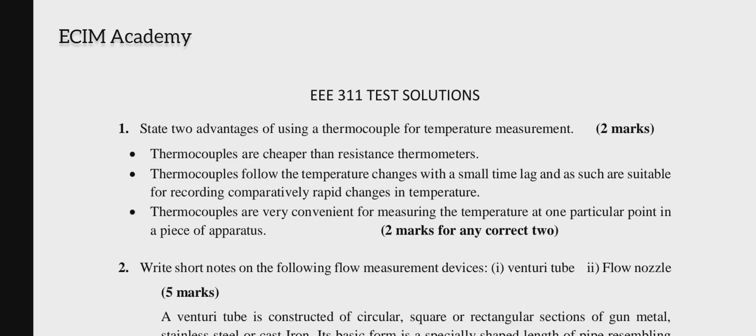Alright, so we have the solution to the tutorial problems on industrial instrumentation. We have the solution to the 4 problems earlier posted on the channel, and here we have the solution on the screen.

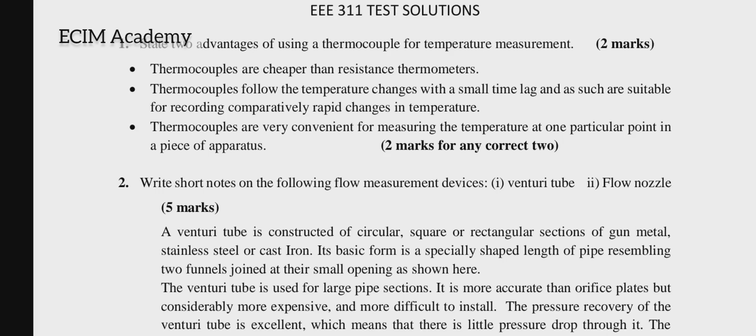As you can see, the first problem states: state 2 advantages of using a thermocouple for temperature measurement. We have 3 advantages listed here. Thermocouples are cheaper than resistance thermometers. Thermocouples follow the temperature changes with a small time lag and as such are suitable for recording comparatively rapid changes in temperature. Also, thermocouples are very convenient for measuring the temperature at one particular point in a piece of apparatus. So we have 2 points there.

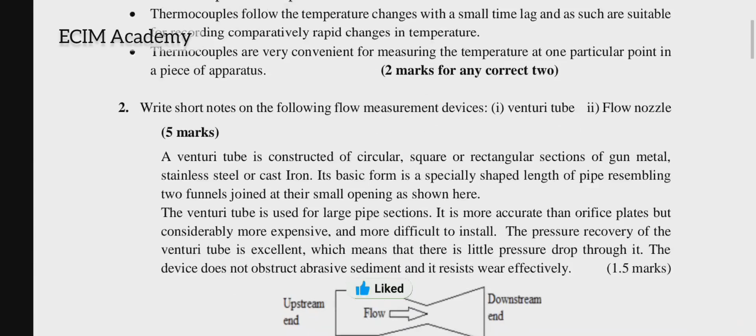And we also go to number 2. Write short notes on the following flow measurement devices: venturi tube and a flow nozzle. A venturi tube is constructed of a circular, square or rectangular section of gunmetal, stainless steel or cast iron, and its basic form is a special shaped length of pipe resembling two funnels joined at their small opening, as shown here.

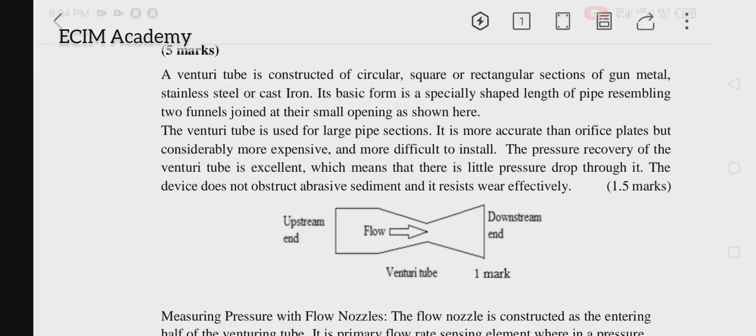The venturi tube is used for large pipe sections and is much more accurate than orifice plates, but considerably more expensive and more difficult to install. The pressure recovery of the device is excellent, which means that there is little pressure drop through it. Okay, so we have the figure here. The device does not obstruct abrasive sediments and it resists wear effectively. So we have the structure of the device.

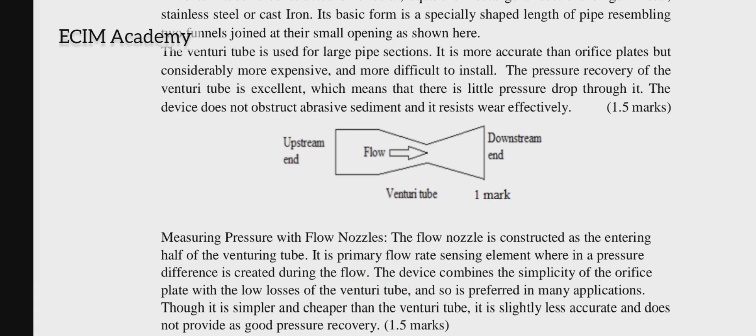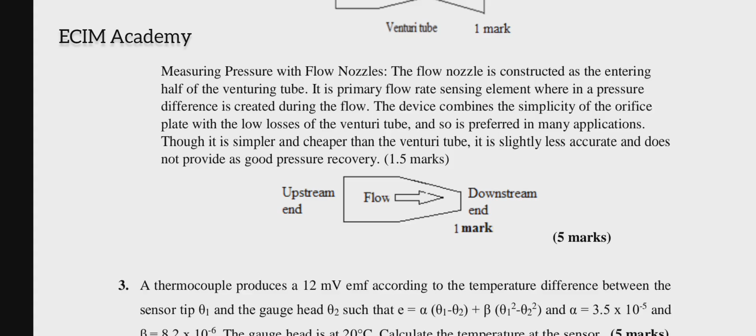Now, the flow nozzle is constructed of similar material, but it's like the entering half of the venturi tube, and it's a primary flow rate sensing element using the pressure difference created during the flow. The device combines the simplicity of the orifice plates with the low losses of the venturi tube and is preferred in many applications. Though it is simpler and cheaper than the venturi tube, it is slightly less accurate and does not provide as good pressure recovery. We have the sketch, the section of the flow nozzle also. So those 2 problems earn you 5 points. Then we have number 3.

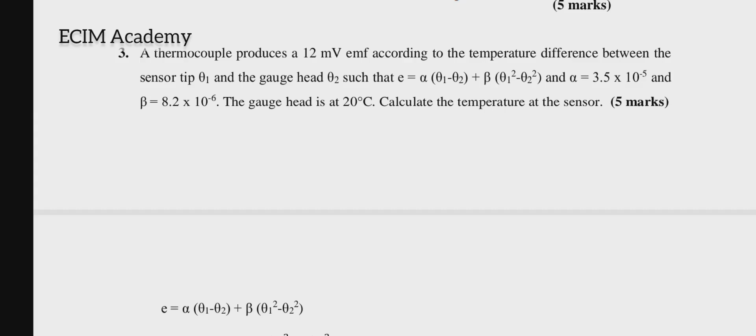It's a question on a thermocouple that produces 12 millivolts according to the temperature difference between the sensor tip and the gauge head. Sensor tip is θ1, gauge head is θ2, so that it follows the equation E = α(θ1 − θ2) + β(θ1² − θ2²). Alpha is given as 3.5 × 10⁻⁵ and beta is 8.2 × 10⁻⁶. The gauge head is 20 degrees C, and then you have to calculate the temperature at the sensor, 5 points. So we have the equation written down here.

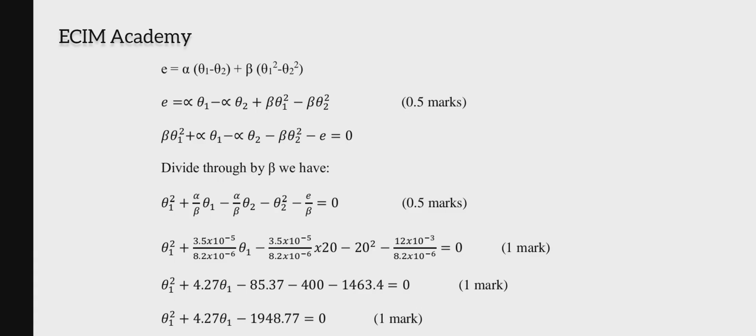So first thing is to express the equation to form the quadratic equation. When you open up the brackets, you collect the like terms and rearrange. As you do that, you get E = αθ1 − αθ2 + βθ1² − βθ2². So βθ1² + αθ1 − αθ2 − βθ2² − E = 0. Alright. Now, if you divide through by beta, we have θ1² + (α/β)θ1 − (α/β)θ2 − θ2² − E/β = 0.

So now we can substitute the values of alpha and beta and the EMF produced, which is 12 millivolts. If you do that, you have the next line: θ1² + (3.5 × 10⁻⁵ / 8.2 × 10⁻⁶)θ1 − (3.5 × 10⁻⁵ / 8.2 × 10⁻⁶) × 20 − 20² − 12 × 10⁻³ / 8.2 × 10⁻⁶ = 0. If you simplify, we have θ1² + 4.27θ1 − 85.37 − 400 − 1463.4 = 0. θ1² + 4.27θ1 − 1948.77 = 0.

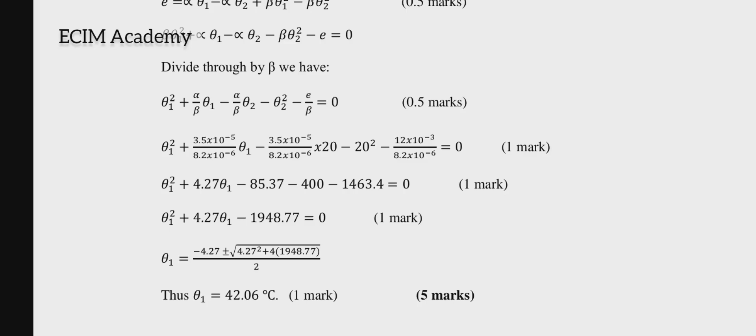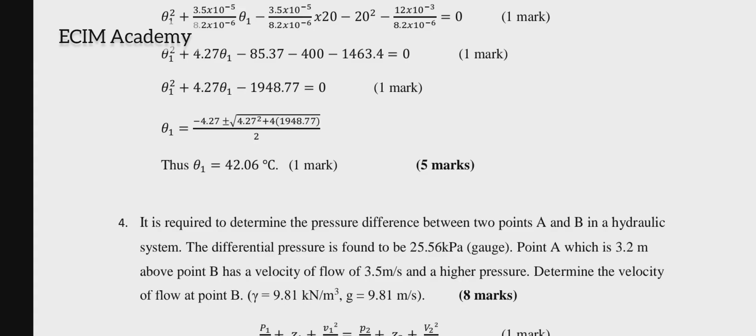So you use the quadratic formula to solve this. θ1 = (−b ± √(b² − 4ac)) / 2. In this case, −b is −4.27, plus or minus the square root of 4.27² plus 4 × 1948.77, divided by 2. Thus, the positive answer will be θ1 = 42.06 degrees C. I will neglect the negative answer.

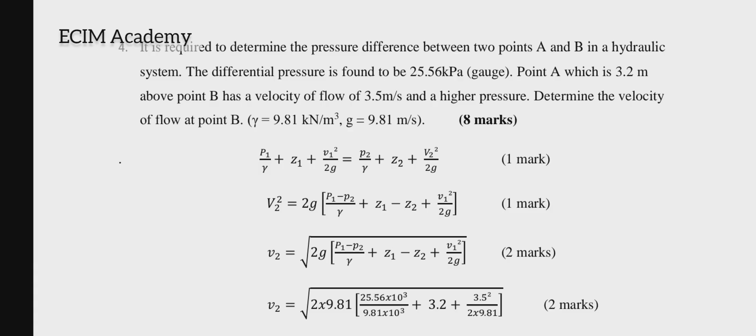That's 5 points. And the last problem: it is required to determine the pressure difference between 2 points A and B in a hydraulic system, and the differential pressure is found to be 25.56 kilopascal. Point A, which is 3.2 meters above point B, has a velocity of flow of 3.5 meters per second and a higher pressure. Determine the velocity of flow at point B. Gamma is equal to 9.81 kilonewton per meter cube. g is equal to 9.81 meters per second squared.

The formula of interest is Bernoulli's equation: P1/γ + Z1 + V1²/2g = P2/γ + Z2 + V2²/2g. If you bring V2 out as the subject of the formula, we have V2² = 2g[(P1 − P2)/γ + Z1 − Z2 + V1²/2g]. So we take the square root of the right hand side now. So V2 = √(2g[(P1 − P2)/γ + Z1 − Z2 + V1²/2g]).

V2 equals the square root of 2 × 9.81 times, in brackets, 25.56 × 10³ divided by 9.81 × 10³, plus 3.2, plus 3.5² divided by 2 × 9.81. So that is the square root of 126.15, and the answer is 11.23 meters per second.